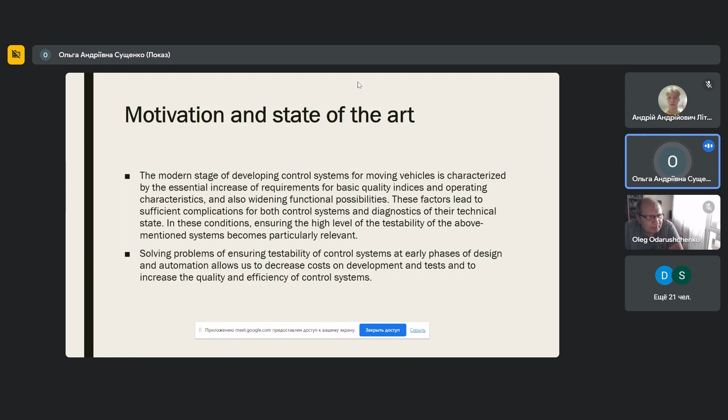Solving problems of ensuring testability of control systems at early phases of design and automation allows us to decrease costs on development and tests and to increase the quality and efficiency of control systems. The efficiency of the application of control systems depends on both their ability to implement necessary functions and the level of ensuring testability, and hence the possibility of checking the technical state during manufacturing and operation.

The success of development, to a large extent, depends on the rational choice of scheme technical solutions at the early designing phases. The matter is that the adoption of cardinal measures for ensuring testability in later designing phases is connected with sufficient expenses. Objective of the research is developing a design procedure for synthesis of the structure of the testable system at the early phases of design.

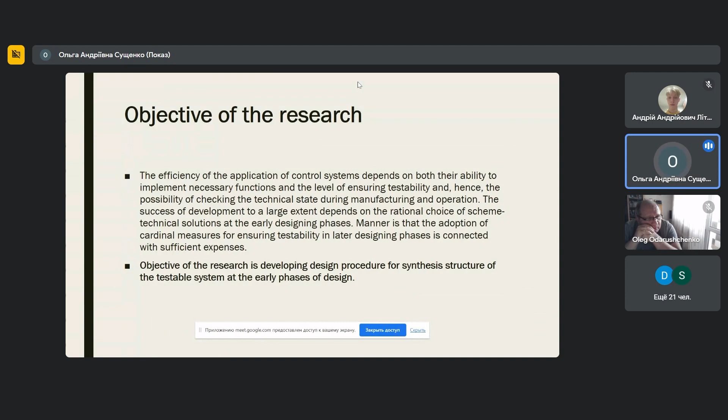For designing control systems, the following indices of testability are of great importance, such as the coefficient of full check of the ability to operate, coefficient of depth of defect search, and coefficient of unit redundancy. These indices depend on dependability indices, mass, and dimension, and also structural features of control systems, including embedded aids of testability and additional test units necessary for determination of the location of the defect.

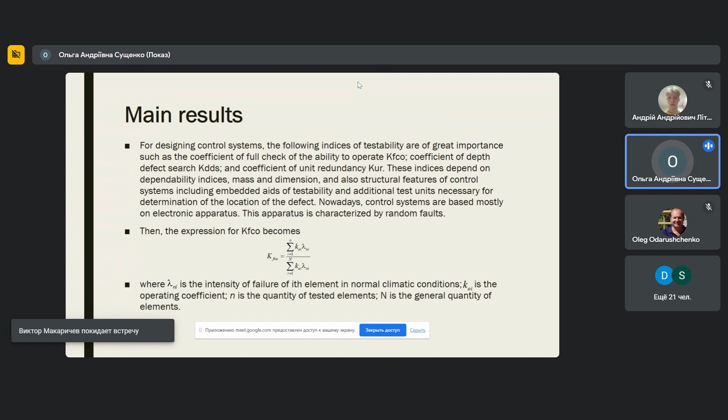Nowadays, control systems are based mostly on electronic apparatus. This apparatus is characterized by random faults. Then the expression for the coefficient of full check of the ability to operate is represented by the expression which you can see on the slide. A prospective control system must be characterized by the essential increase of dependability.

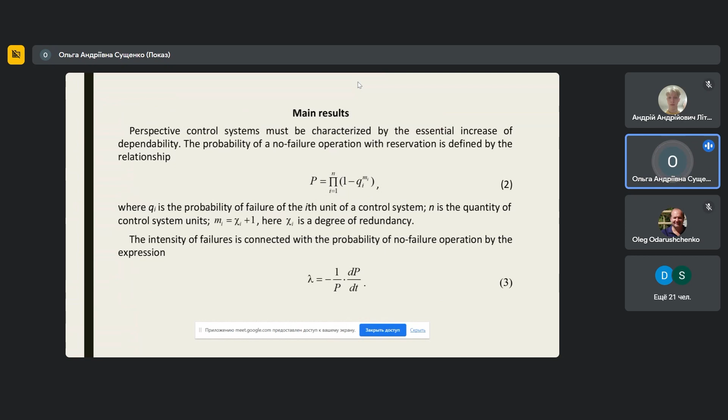The probability of no-fail operation with reservation is defined by the relationship 2. The intensity of failures is connected with the probability of no-fail operation by the expression 3. Substituting 2 in 3 and using the expression for the probability of failures of the i-th unit after differentiation, we will obtain the relationship for determining the intensity of failures, which is described by the expression 4.

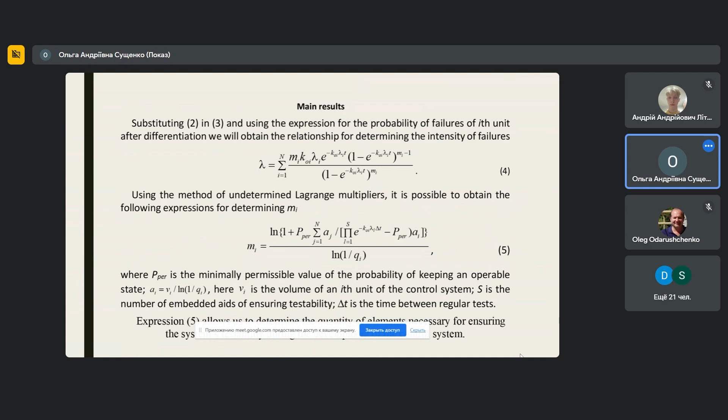Using the method of undetermined Lagrange multipliers, it's possible to obtain the following expressions for determining the quantity of basic units of the control systems, MI. This expression illustrates this thought. The information coefficient of the depth of defect search for M controllable quality indices can be represented by expression 6. The coefficient of unit redundancy relative to control system volume can be determined based on the expression 7.

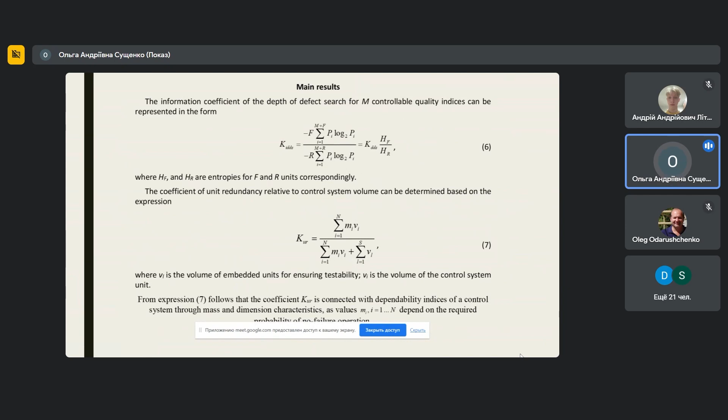Here we use the volume of the embedded units for ensuring testability and the volume of the control system unit. From expression 7 it follows that this coefficient is connected with dependability indices of a control system through mass and dimension characteristics, as values MI depend on the required probability of no-fail operation.

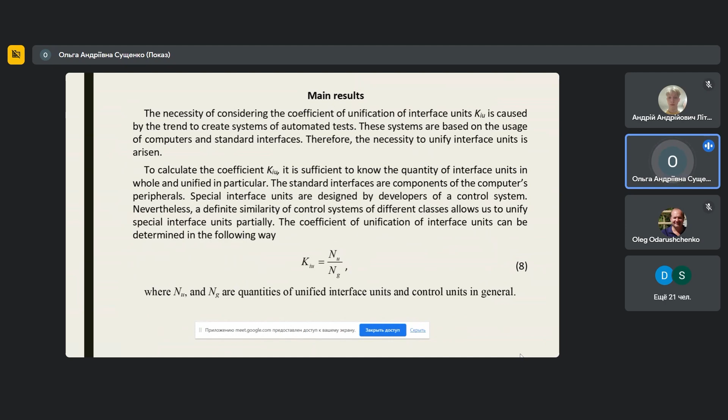The necessity of considering the coefficient of unification of interface units is caused by the trend to create systems of automated tests. The systems are based on the usage of computers and standard interfaces. To calculate the coefficient of unification of interface units, we must know the quantity of interface units in whole and unified in particular. The coefficient of unification of interface units can be determined in the way described by the expression 8.

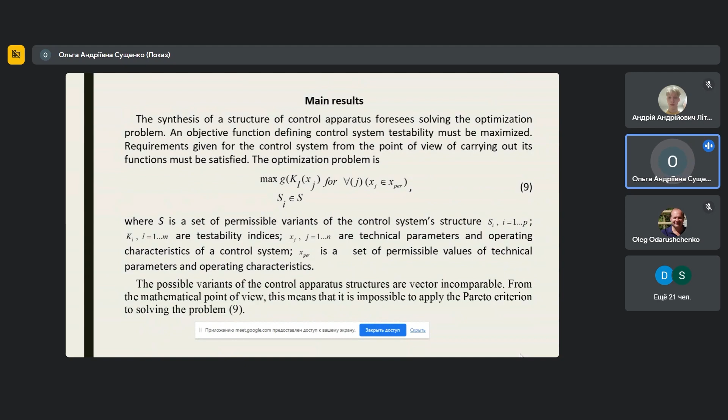In practical situations, quality indices of one system include both best and worst quality indices in comparison with quality indices of another system. This causes the necessity to apply conditional preference criteria. Moreover, the problems of the synthesis of different technical system structures, including control system structures, are multi-criteria. It's desirable to decrease the dimension of these problems by introducing result quality indices represented in different forms.

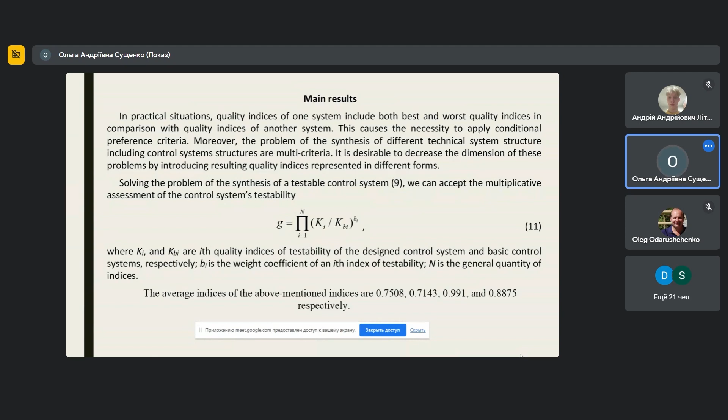Solving the problem of the synthesis of a testable control system 9, we can accept the multiplicative assessment of the control system testability. The expression 11 illustrates this multiplicative optimization function. For determining weight coefficients, the method of priority permutations has been applied. It has the following advantages in comparison with other methods.

The error of the expert introduced at the comparison of some pair of studied objects does not lead to errors at following comparisons. After the third iteration, the weighting coefficients have been obtained. And of course, it was necessary to use the opinion of experts for these operations. Constraints of the optimization problem have a dual nature. On the one hand, they are defined as a set of non-strict equalities, which define permissible by the specification performance limits on control parameters.

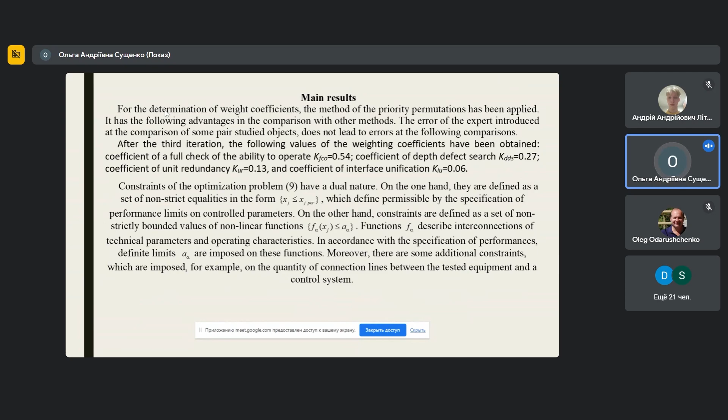On the other hand, constraints are defined as a set of non-strictly bounded values of non-linear functions, which describe interconnections between technical parameters and operating characteristics. For the definite class of technical systems with different but finite functions, it's possible to describe a priori functions and appropriate scheme technical solutions at the level of structural units.

The mathematical description of variants of control system structure can be made on the basis of oriented graphs. The usage of the incidence matrix for computing operations allows us to automate the analysis of structural features of a system. Mathematically, the generalized description can be realized by the matrix column of the redundant implementations and the rectangular matrix of the possible units. In this case, the structure of the designed aircraft control system can be represented as C = AB.

To determine the necessary set of structural units, it's necessary to carry out the analysis of the requirements. Rules of transformation of incidence matrices for the graph nodes that characterize units are different for units having a connection with external medium and carrying out functions of transformation.

Nodes and arcs of an oriented graph, which describes the structure of the control system, can have weights corresponding to the system characteristics. Therefore, intensity of failures of appropriate structural units can be interpreted as weights of the above-mentioned graph nodes. The arcs of the oriented graph can determine the number of additional connection lines necessary for testing a structural unit. This allows us to estimate the depth of the defect search.

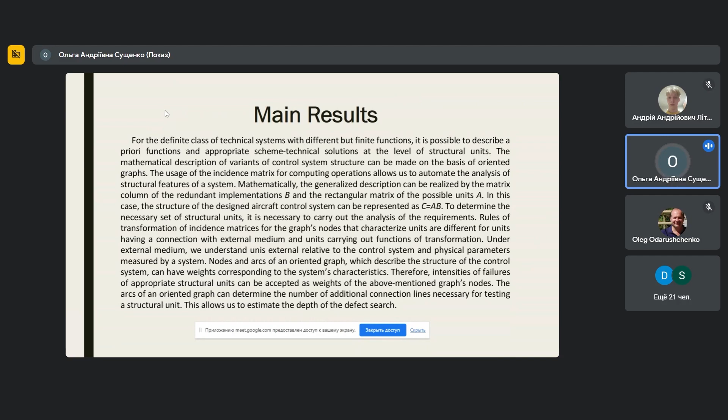The synthesis of the structure includes the following stages. 1. A weighted oriented graph representing the structure of the control system is formed using technical requirements. 2. The node of the oriented graph that corresponds to the least dependability is chosen. 3. Measures of ensuring dependability of the chosen node are applied. For example, additional connection lines are introduced. The quantity of these lines is bounded by the weights of input and output arcs.

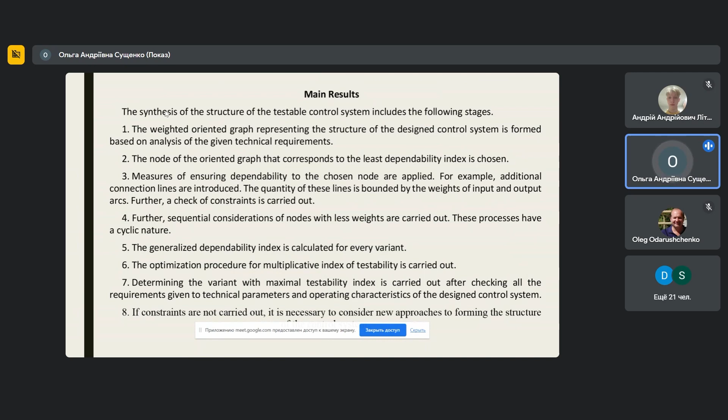4. Sequential consideration of nodes with less weights is carried out. 5. The generalized dependability index is calculated for every variant. 6. The optimization procedure for the multiplicative index of testability is carried out. 7. Determining the variant with maximal testability index is carried out after checking all the requirements given to the technical parameters and operating characteristics of the designed control system. 8. If constraints are not satisfied, it's necessary to consider new approaches to forming the structure of the control system. Case study.

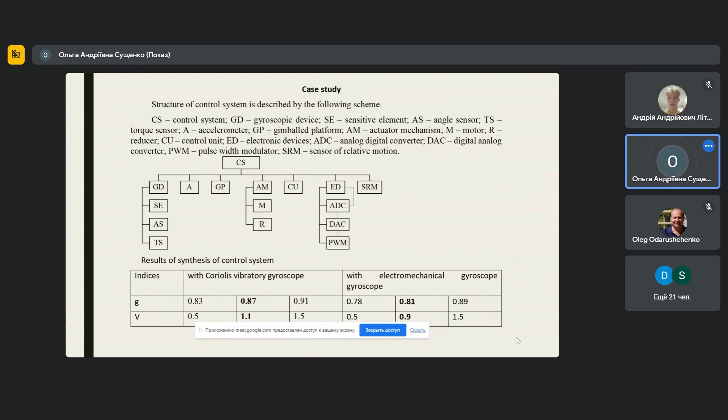The control system for a moving object has been studied. The main blocks: gyroscopic device, sensitive element, angle sensor, torque sensor, accelerometer, gimbal platform, actuator mechanism, motor, reducer, control unit, electronic device, sensor of relative motion. The results of this procedure you can see in the table. We consider two variants, with a Coriolis vibratory gyroscope and with an electromechanical gyroscope as gyroscopic device. And you can see that we could find a compromise between the high testability index and constraints on mass and dimension characteristics.

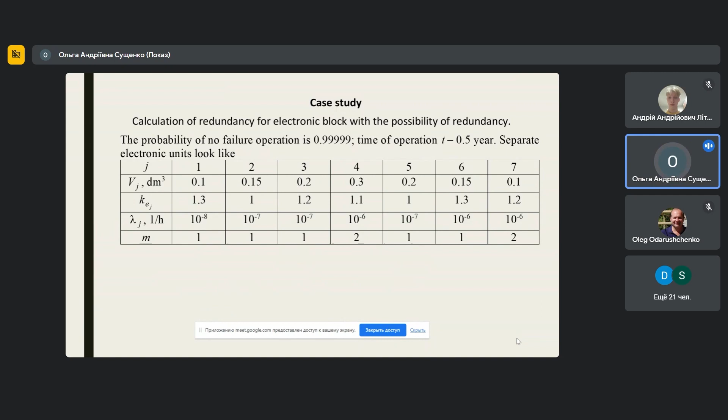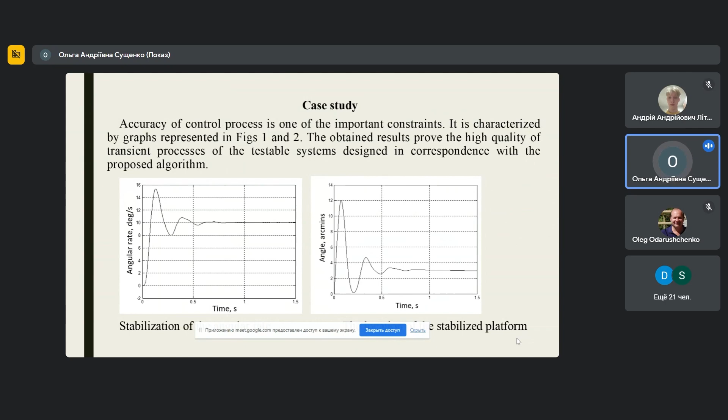Calculation of redundancy for electronic blocks with the possibility of redundancy can be done. You can see here basic characteristics of the electronic blocks and calculated quantities of elements necessary for ensuring given dependability requirements. Because we consider control systems of moving objects, one of the most important constraints is their accuracy. And we show that the accuracy is satisfied using representation of the transient process, because usually such an approach is accepted for control systems of moving objects.

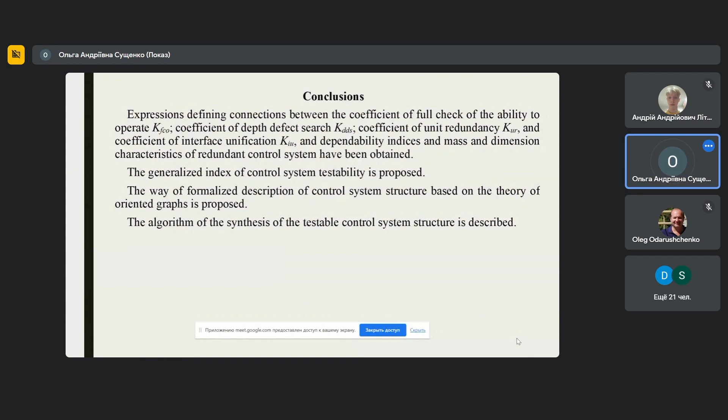Conclusions. Expressions defining connections between the coefficient of full check of the ability to operate, coefficient of depth of defect search, coefficient of unit redundancy, and coefficient of interface unification, and dependability indices and mass and dimension characteristics of redundant control systems have been obtained. The generalized index of control system testability is proposed. The way of formalized description of control system structure based on the theory of oriented graphs is proposed. The algorithm of synthesis of the testable control system structure is described. Thanks for your attention.

Thank you very much, Olga. Have you questions, colleagues? I have a small question. Okay, Alexander, please.

Tell me, please, what is the practical application of your approach? This approach is used during design of control systems for moving objects, such as marine control objects, gimbaled inertial navigation systems, because namely in these cases it's necessary to use very precise gyroscopic devices, such as the traditional electromechanical gyroscope, and it's very important to find a compromise between mass and dimension and reliability of the control system and its ability to test. Thank you very much for your answer.

Thank you. The next question, please. I have one question. What discussion questions can you currently identify? Sorry, I don't understand the question. What discussion questions for your research remain now? Discussion questions. Yes, I understood. It is necessary to improve the optimization procedure. Perhaps we plan to use new approaches; we want to make this procedure better. All theoretical positions are grounded and they will be the same. Thank you.